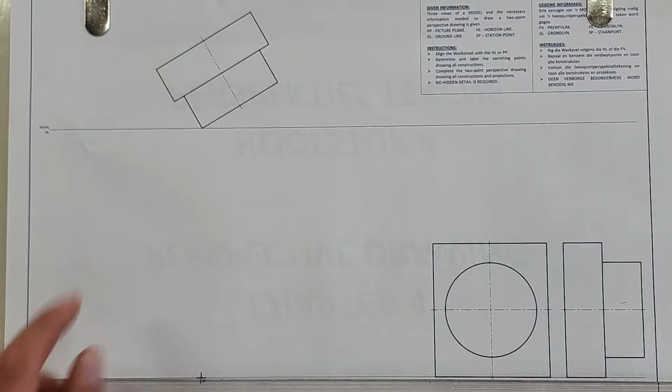Right, so we're back here on page 41 in the HSE Amazing Workbook, and they've given us 3 views of a model. We have a top view given, and then we have a front view and a left view. So if I look from the left hand side, this is what I will see. That surface there is this one, that surface is this, and then from the front, of course, it's in this direction. Then they give the picture plane, and the HL, interestingly enough, is on one line. At the bottom, we have our station point and ground line. Also, SP is on the ground line.

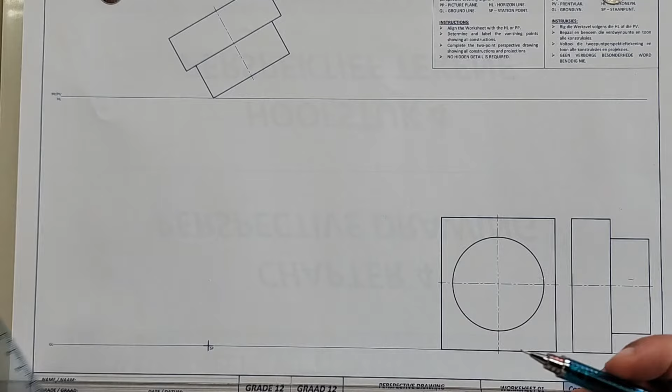Now we've done this in previous grades, of course, so it should be all straightforward for you. How do we start a 2-point perspective? I'm just going to go through the basics in this lesson to make sure you understand it. What's the first step? What's the eerste stap? Help me out. You determine the angle there, after you've lined up your paper, of course.

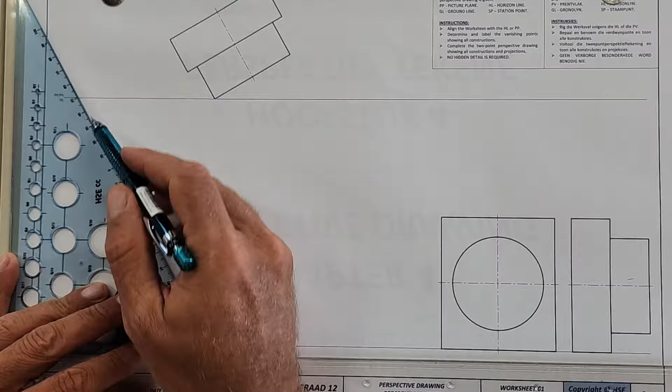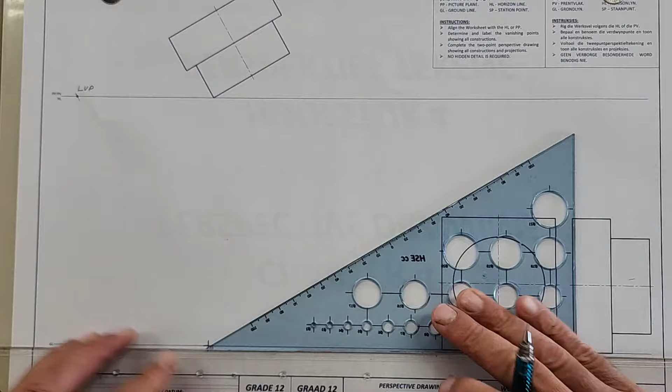Then from your SP, you're going to aim for the picture plane, make a mark. Now, in other examples, you would have projected down to that HL, but it's on exactly the same spot. Grade 12s, make a dot right there, left vanishing point. That's 2 marks already in this drawing. Next one, you flip it, double check the angle, it's at 30 degrees. If you need an extension, help yourselves out here. It's at that point, make a clear dot, right vanishing point. You've got your first 4 marks and you haven't even started.

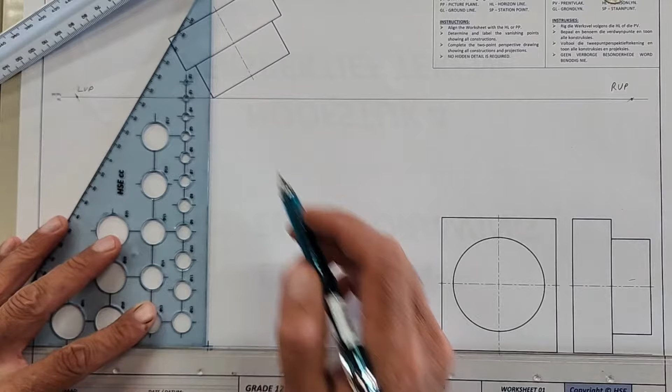Next one is to draw your line down from this corner to the SP if it's in line with each other. That's your reference line. I'm just going to move my board a little bit because I want you to draw with me.

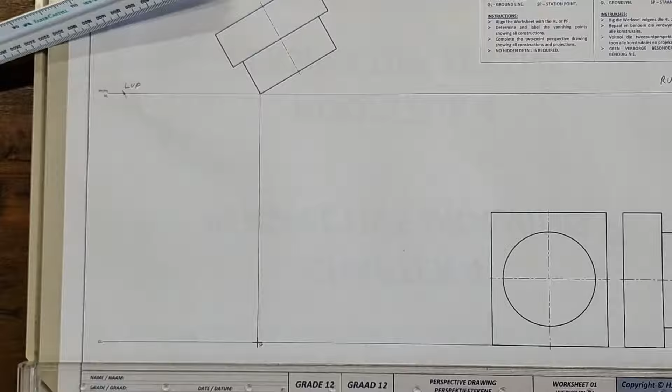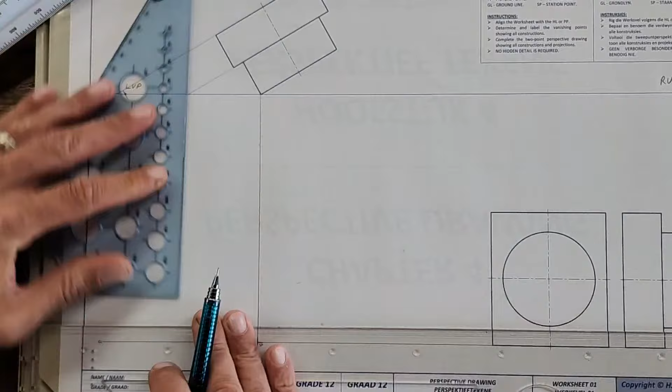How to hack a 2-point perspective. You are going to do the following. We're going to project our top view onto our picture plane. I need you to look at me. Hey, almal van julle. At that 30 degrees, this is how we hack it. We're going to just project these corners down to the picture plane. So there's one, there's the other one. Yes or no? This one is already there. Let's move now this point down to our picture plane. We'll do one at a time.

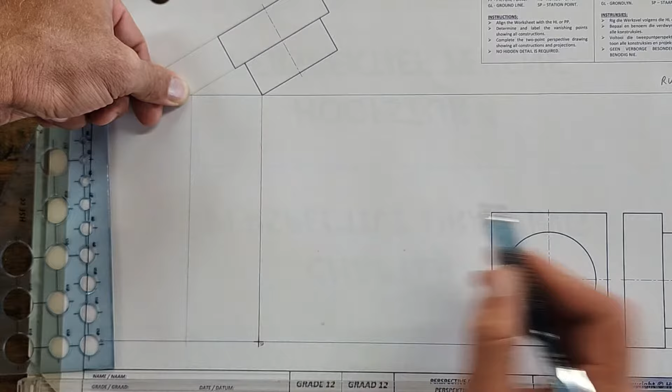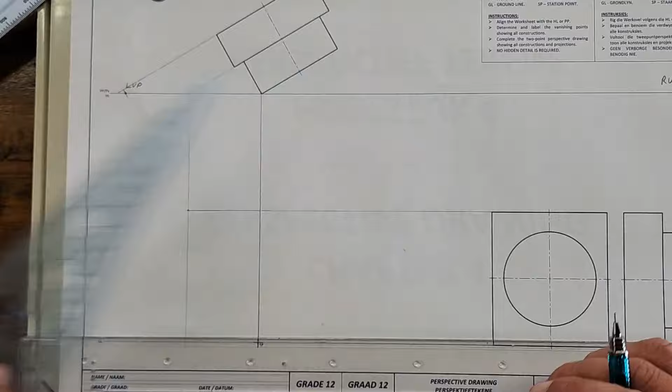Let's just draw this back part first. This height, I'm going to project across to where it touches the height line that I've brought across. So I'm bringing this point across and down, and I'm bringing that same point from the other view to bisect it, to meet it. I'll draw them in color for you in a moment. So that's a construction line. From this point, where do I go to now? Back to the right vanishing point. And what I have here is a line that actually runs on that top all the way. And all I need to do now is bring this corner down to the SP.

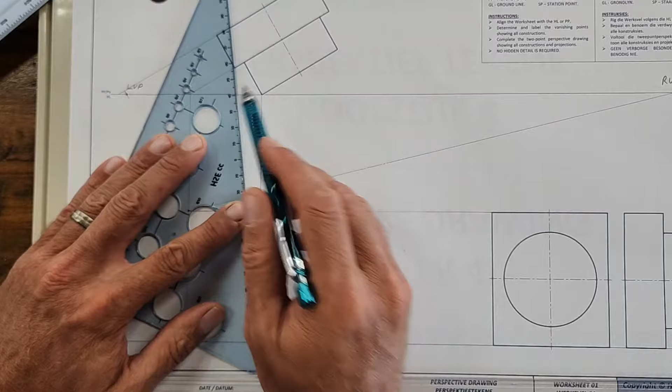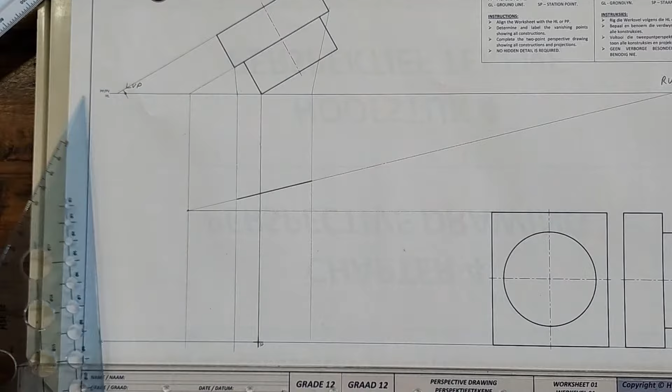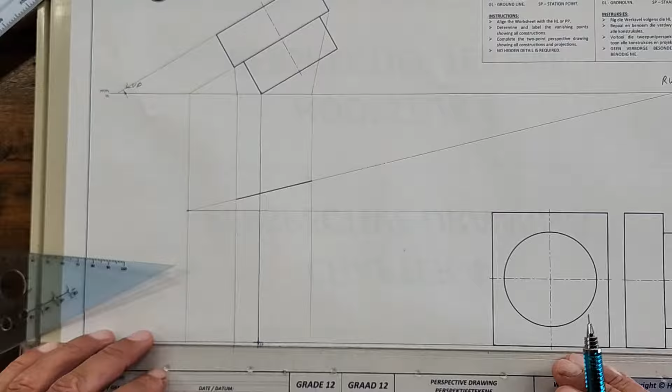I'm going to repeat myself if I've lost you. You'll see what happens now. Bring that corner to the SP. Aim it for the SP, and down. And this line here is the front of that box at the back. Keep with me, don't disappear. Then it goes down. So this corner here goes down up till this, right? That is already at the SP here at the bottom. This corner goes back to here, down. That goes across, and we're doing the same with the bottom of it.

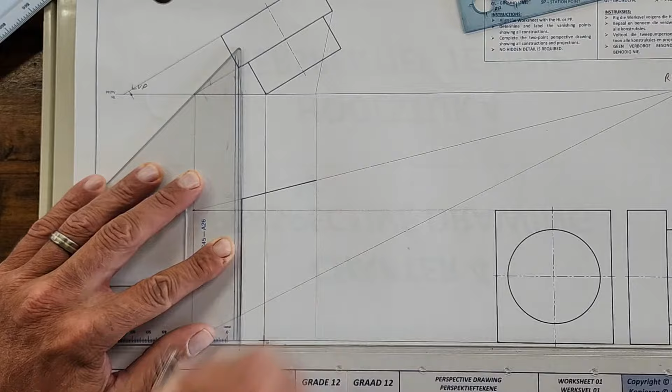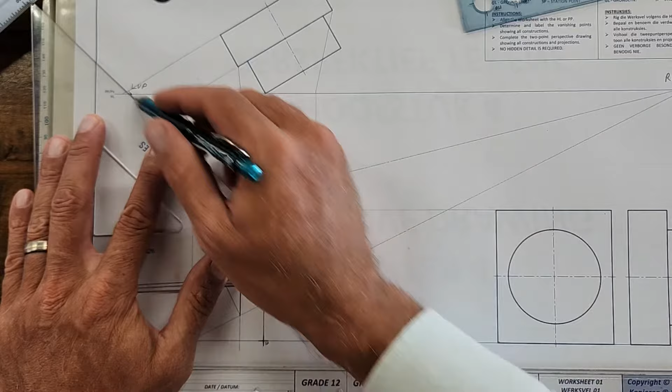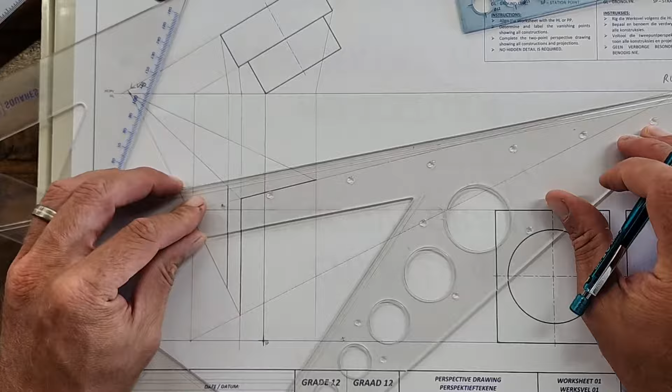Same step. Some of you might not have seen this specific method before. So what we have, this line is this line. That line is this line. There's still some depth that needs to be added here. You agree with me? Where does this go to? To the vanishing point. Back, back, and back, all three of those corners. How far back? Well, there it is. From this point bring it down to the SP, aim it down to the picture plane, and then straight down. I'm going to repeat myself in a moment.

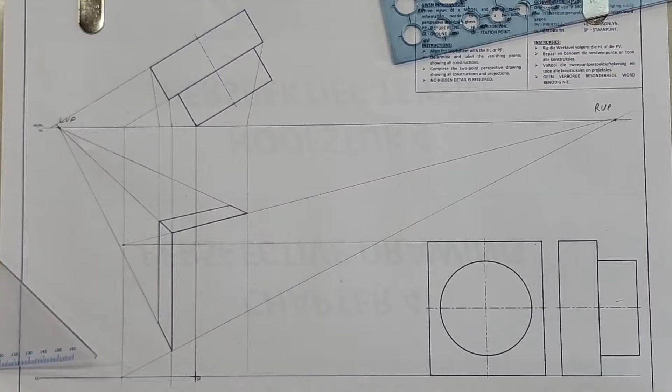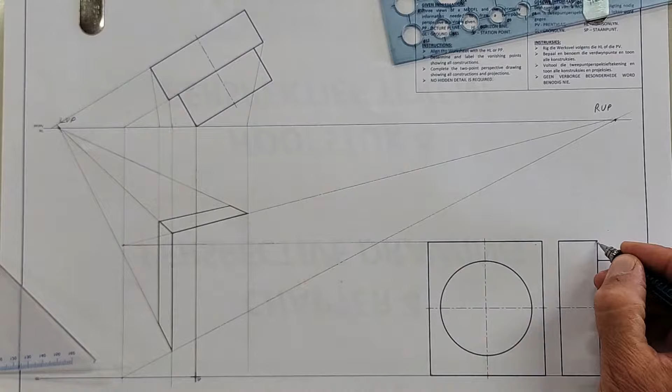This is probably the easiest way. There are other methods also, of course. But let me talk you through how I got to this point. So I have a top view and I have a front view. You pick a point here. We bring that point at the same degrees down to the picture plane and straight down to the SP. We pick the corner. This corner, you agree with me, is this corner. Yes or no? Yes. So we've projected it to the picture plane and down. And then we bring the height across. And where they meet each other is a critical point.

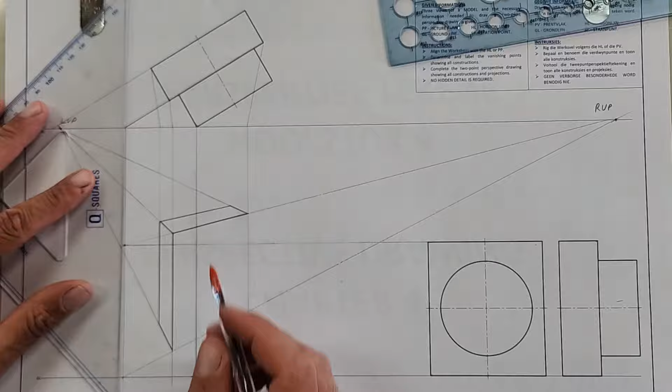Okay. So let me draw this in red for you. We projected this one down. Then we've projected from that point straight down. Okay. And this corner is in fact that corner. So the height brings across. Where it meets is that pink dot.

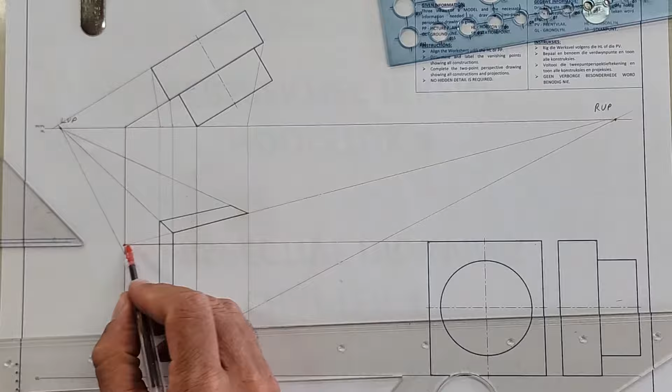And from there, I now project it back to the right vanishing point. So it's a construction line that runs along the top of that front. And so all I need to do is aim to the SP these two corners. If I bring them down, I get those two front corners. And from there it goes down.

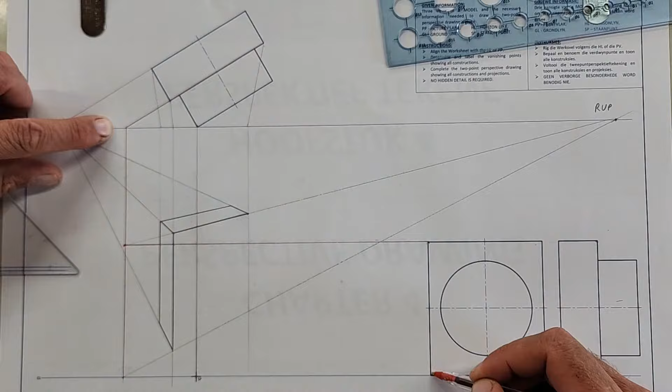So the same here, this corner is also the one at the bottom. Bring that across where it meets. I project back to the right vanishing point. Now I've got the line running at the bottom here. And all I did is bring those same points down. I have that bottom corner and that bottom. We won't draw this one yet because there's a circle there.

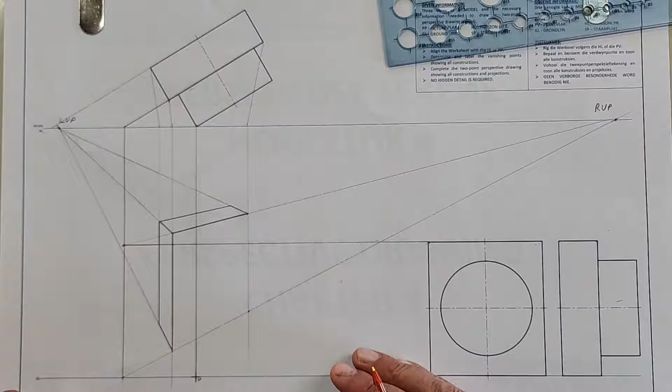Okay. On that step, is there anything that you'd like me to repeat? Did you get to start? Are you on the same step as I am? Yes or no?

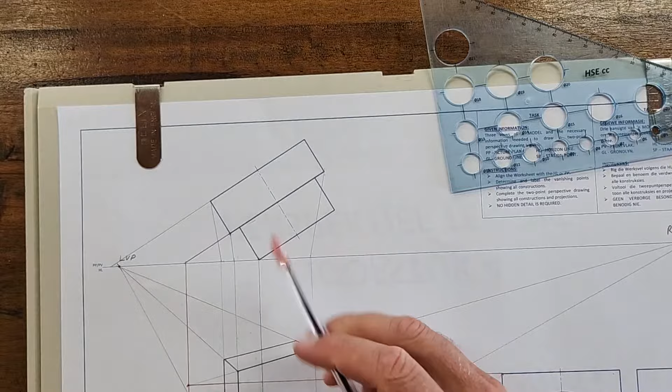Ja. Is jy by? Anybody needs me to repeat the step? Happy? Okay. What I wanted to remind you is if you start this drawing, look at your top view quickly and do this. Any line in this one that aims in this direction, that center line, this one, where is it heading if I would extend it? To the what? To the left vanishing point.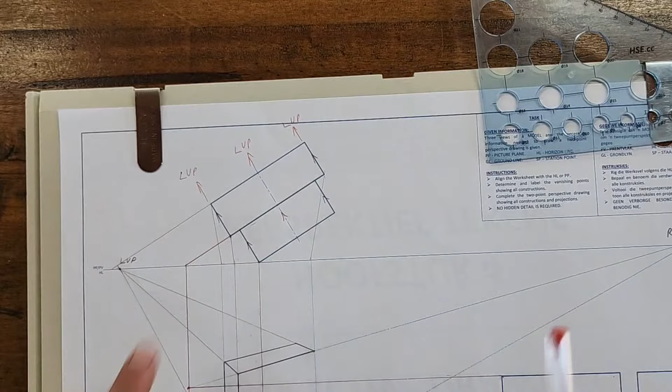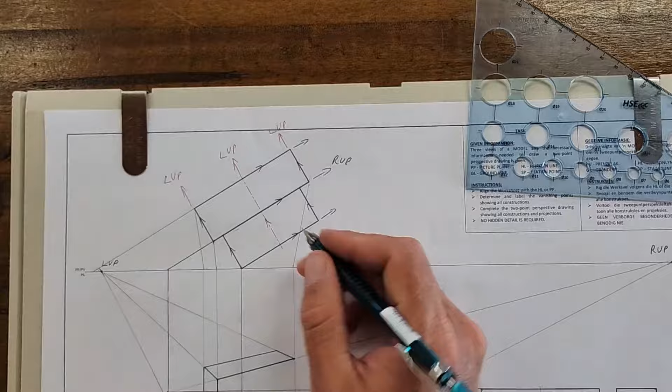Okay? Any line that's heading in this direction is going where if I would extend it? The right vanishing point. Do that at the beginning because these drawings are going to become so complex that when you are here, it's going to start getting confusing. But if you've, in the beginning, helped yourself with something like this to tell you, lines heading in this direction, they are going to the...

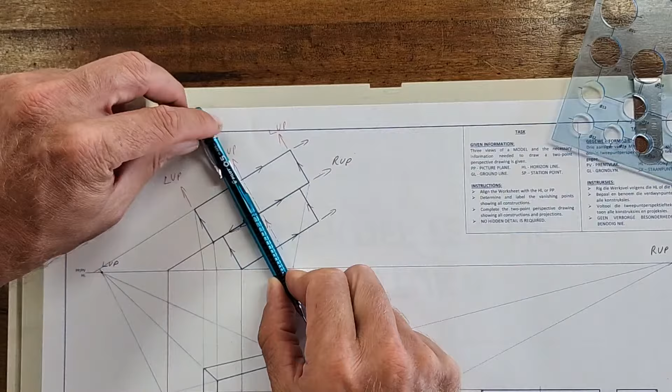Do you agree with me? A line heading in this direction, it is still aiming at the right vanishing point. It's orientated in the axis to the right vanishing point. Because sometimes you'll go forward and then you'll think, do I go right or left now? But it's in the same line, left vanishing point. All those lines. Okay. Yes or no? Oh, glory. All right.

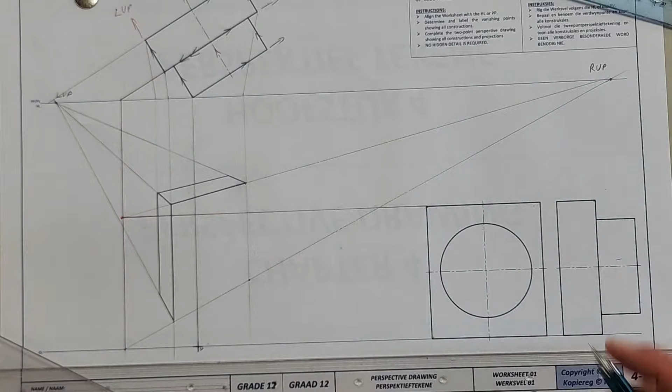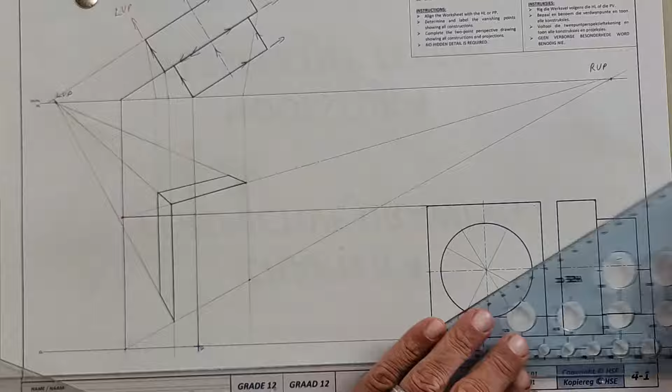Let's now see if it's going to work with our circle as well, because that's our next step. A circle, if you have a circle and you don't know what to do, what do you do? 12 equal parts. So just here on the side, flip it. Okay, so we want to see this construction. Don't think you can take out a French curve and get this done. We'll start here with the 0. 1, 2, 3, 4, 5, 6, 7, 8, 9, 10, 11, back to 12.

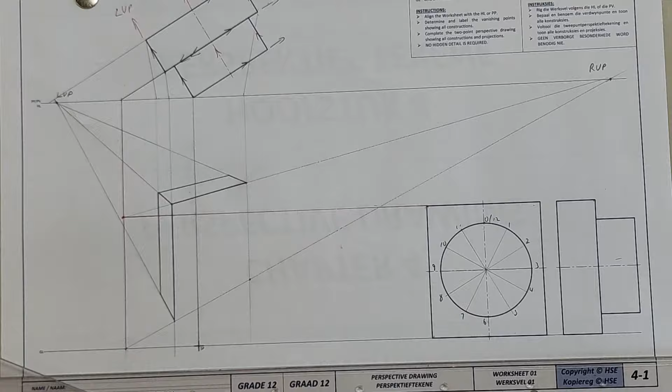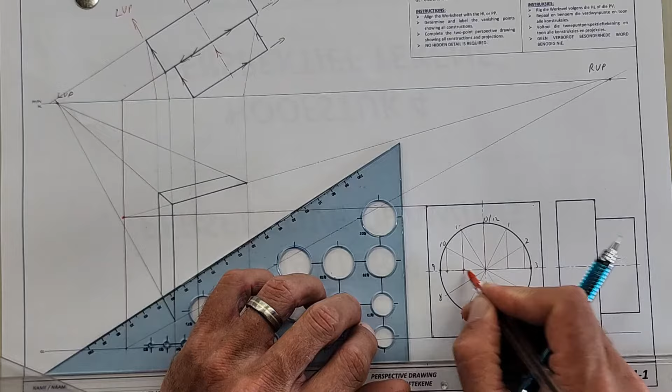Okay, but what do I have here? If you look at that, 3 is already on that line. If I bring 2 down, there's a mark. 1 down, there's a mark. 0 here. 1, 2. So these points are the ones that I need to copy to my top view. And the easiest way to do that is to take your compass.

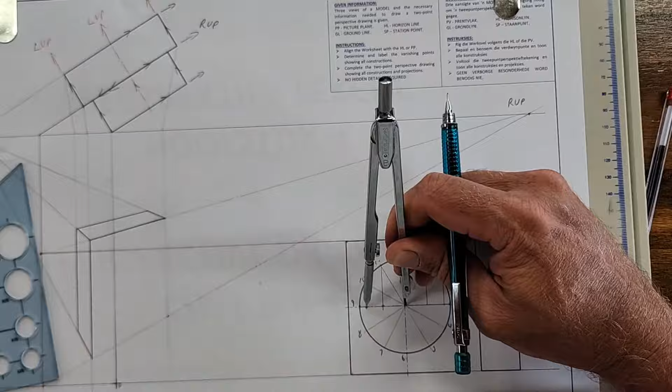Well, we know that the outer one, of course, should be the same as the one that's given. All right. So now we just go to the second one, that distance, yes or no? Take this away, this way. That should be the same on either side. Okay, so I'll just zoom in here a little bit for you to see this.

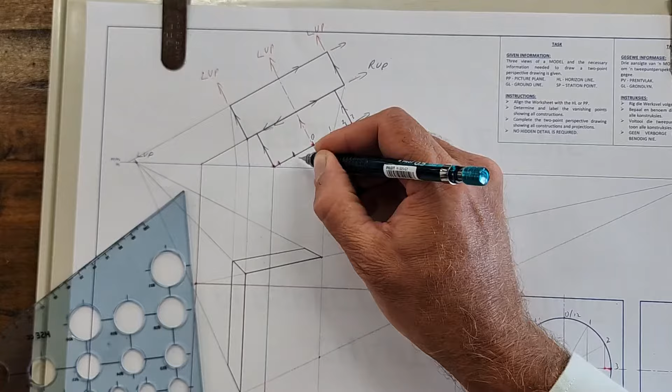Okay, so there are now these measurements I've gotten from here. And they are in fact representing on the top 0, then that's 1, 2, 3, below it is 4, 5, 6, 7, 8, 9, 10, 11, and 12. See the numbering? Similar to here, 0, 1, 2, 3, 4. And so now I can do exactly the same steps that I've done up to now. So let's see if that works.

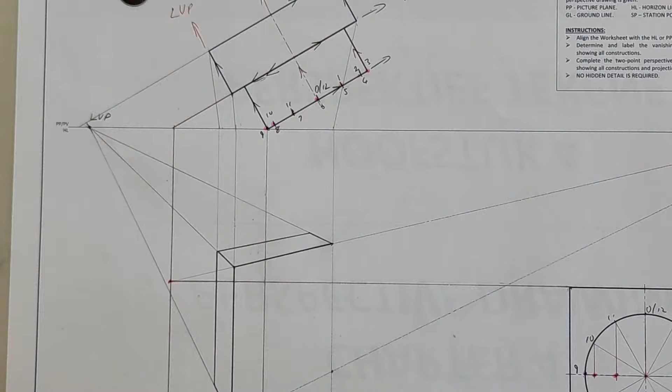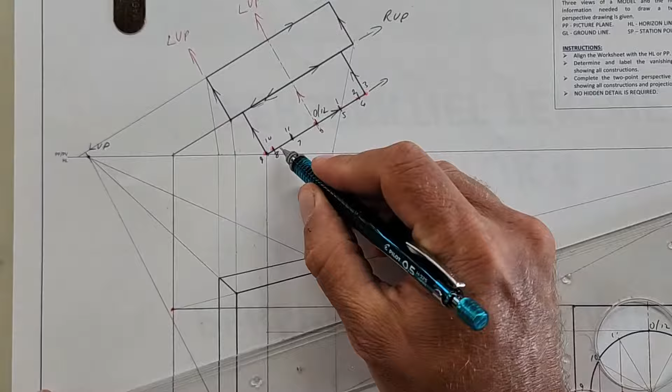This line is already aimed to the picture plane. It's at that point. Come down. Now I bring across my heights. So let's just do the 0 and the 6. There's the 0. There's the 6. Okay. And what do I do now? I go back to my right vanishing point. Look at this line. This line was aimed to the right vanishing point. So now I aim that to the right vanishing point.

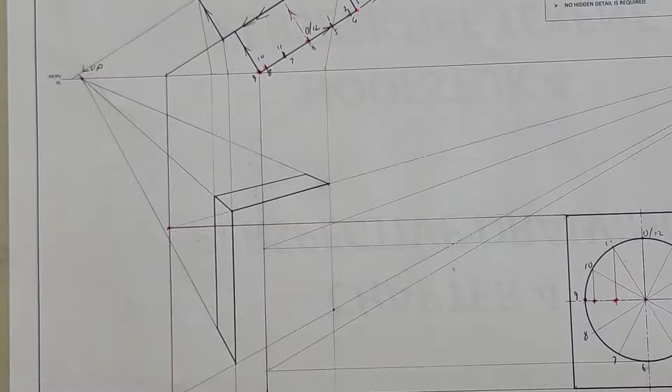Okay. Same with the bottom one. Okay, where is 0 and 6 on this? Well, I'm going to get that from the top. 0 and 6. Bring that down. There's my first 0. There's my 6. Okay, now let's do the next one.

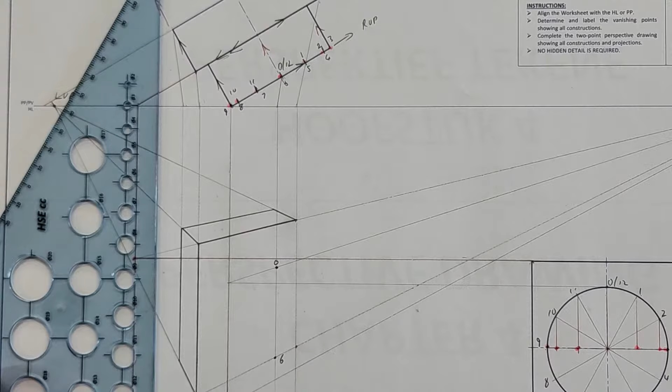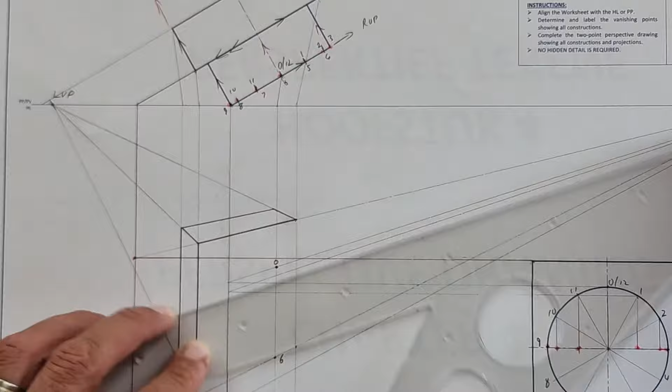Let's take 1. All of these are already to the SP, down. I'll take the height from here, the 1. So just one at a time. There's 1. Well, technically 1 and 11 are on the same height, right? Aim it to the right vanishing point. Now I can bring 1 down.

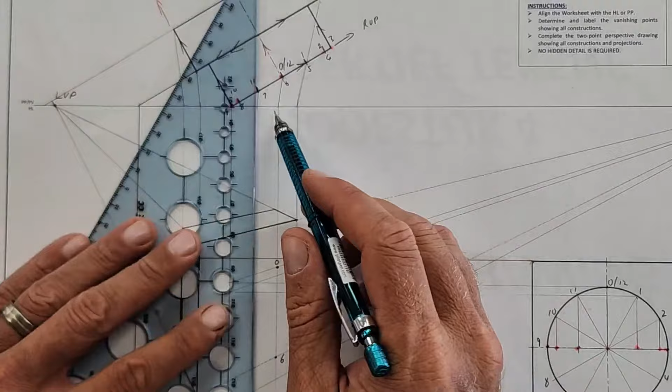Okay, let's do 11 while we're on that line. Aim it to the SP. That's 11. Are you following? Next one is number 2, which is also the bottom of 4. You just do 2 first. There's 2. Bring that across. You can do 4 across.

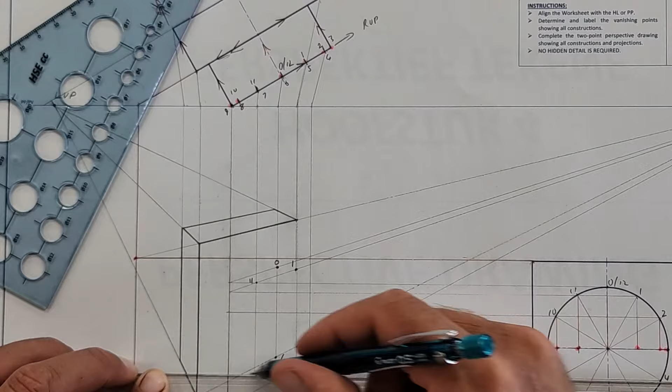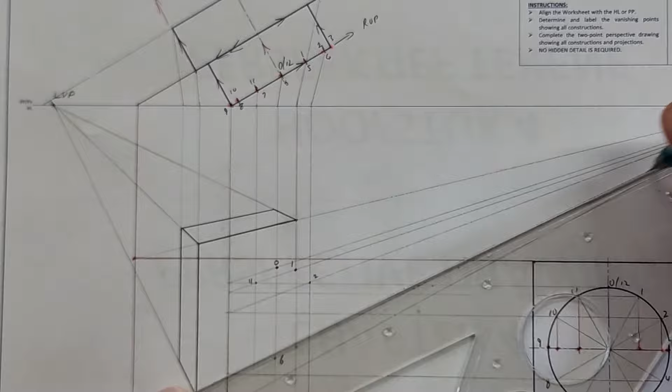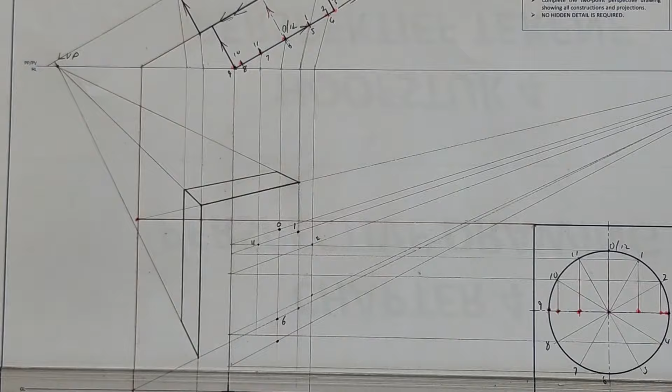So where 2 and 2 meets, dot. Where 4... actually skipped 5 is 6. So there was 6. Made a little bit of a mistake. That one was 6, sorry about that one. So 6 is in line here, back. Okay. Then 5 at the bottom.

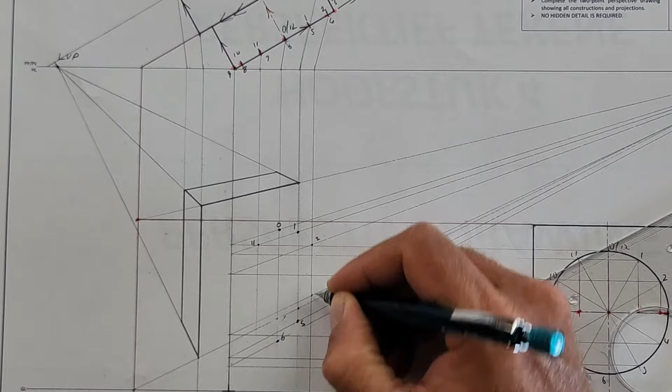So the outer part of 3 is still missing. Let's do that quickly. So from the outside here, I'll give you a valuable point now that I don't want you to forget. That's 3, height goes across.

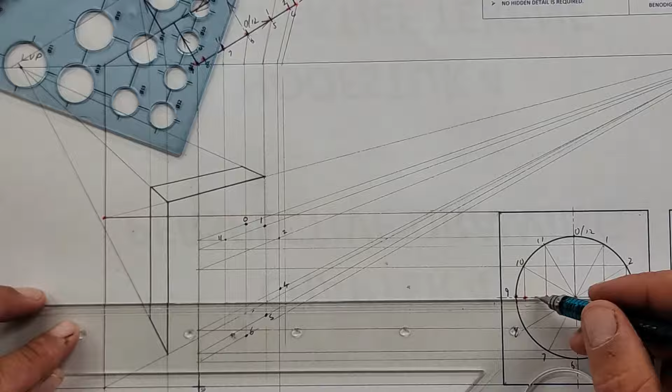What do you think is the biggest temptation for an EGD grade 12 learner doing a 2-point perspective? What do you think would be the temptation here with a drawing like this that you have to be cautious about? Kom help my gou.

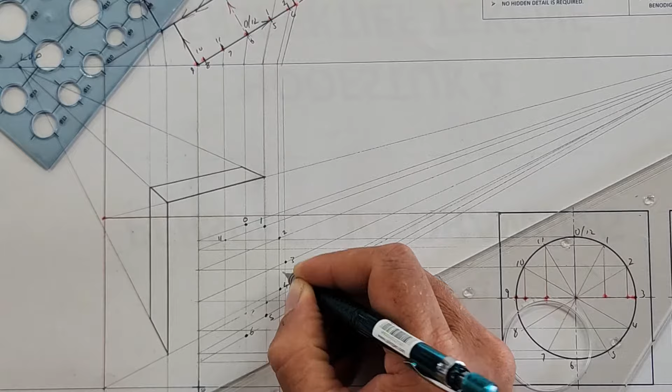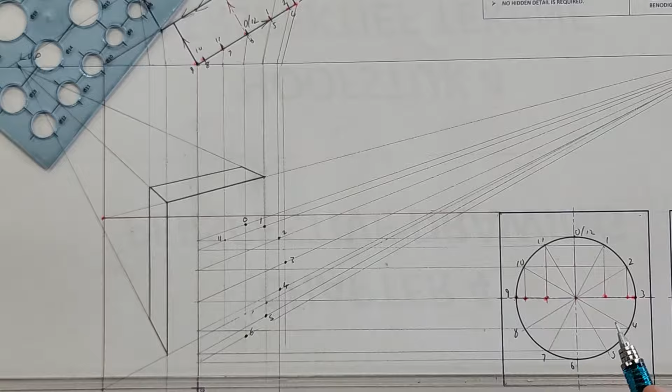Alright. How many of you have already done it? You've just gone and you've gone to all these different points. You've already brought them over. And all of these on top you've brought over without drawing any dots yet. You've just done it. Nobody? Yes, you've listened in the past. Please, people, do one at a time, because you see there's a lot of lines here. Ne? It can so easily confuse you.

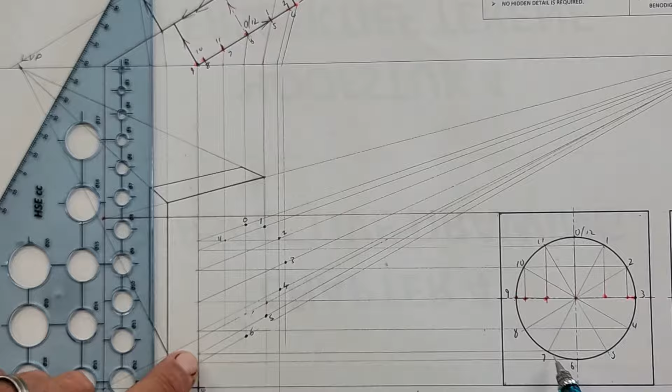So let's do 7. 7 goes across. It's the same as on 5. There it is. It's in this line. There's 7. Let's bring 7 down. Okay, it was in line with 11, so that's going to be straight down. But see here, now I have to keep my mind in line.

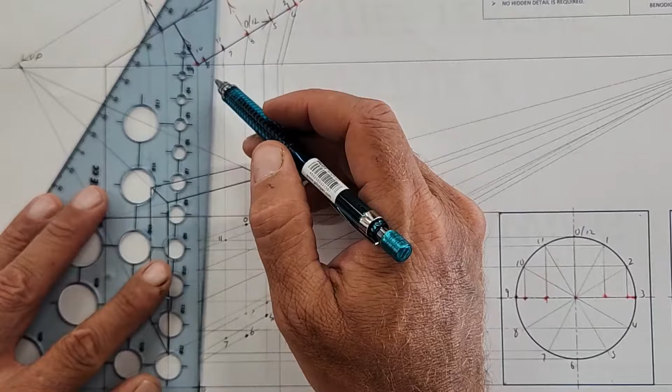Yeah, but I've already done this half. So it is easier. Once I get over half of it, it probably can be easier. But try to do everything at the same time, it becomes very complex. So I just want to caution you. Remember, this is now just a circle, but look, there's a lot of other lines also that you could have brought over. Ne?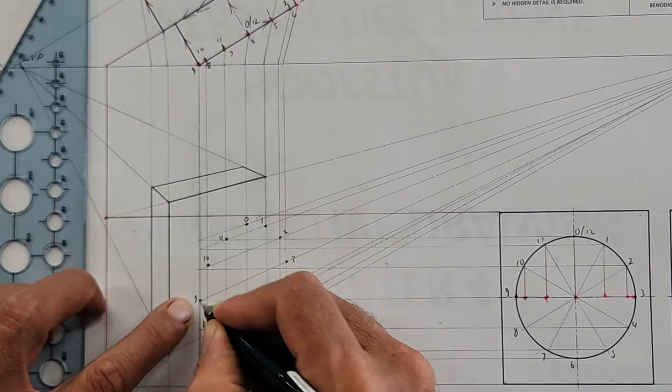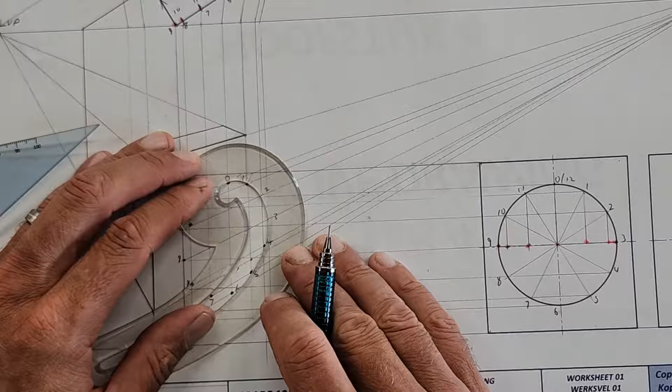There's our 8. So our 9 is going to be right there. 10. Okay, and if you make these dots nice and clear, that's going to help the marker to see that you are drawing with confidence. And then you're going to take your French curve. Find a spot on it that works for you. If you can, try and go through at least 3 dots at a time, just to help with the smoothness of this arc.

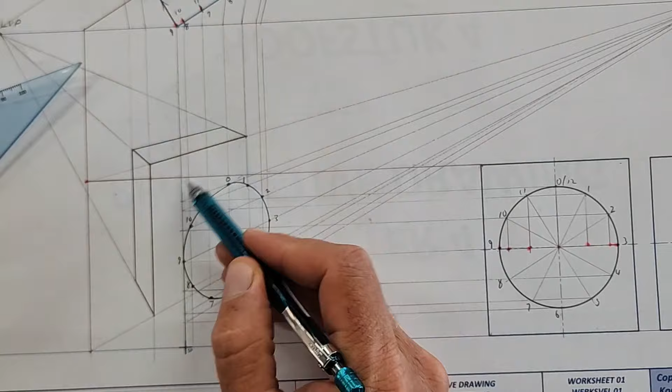Okay, there's the front, then it goes back. There's another circle here on this side that I'm going to still have to draw in. How can I do that? Well, I know that these lines can go to the back here, so that 0 can go to the back. That 11 now can go to the back. The 10 can go to the back. So also the 9.

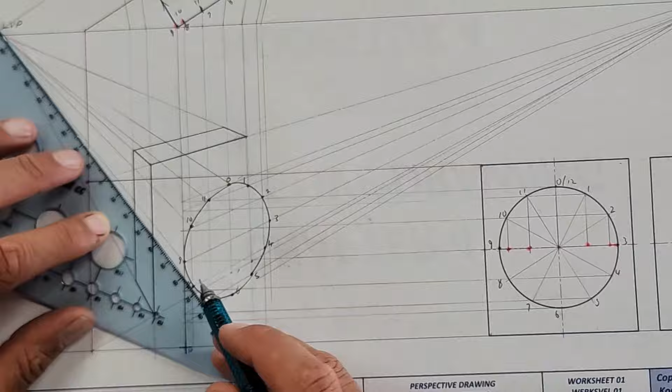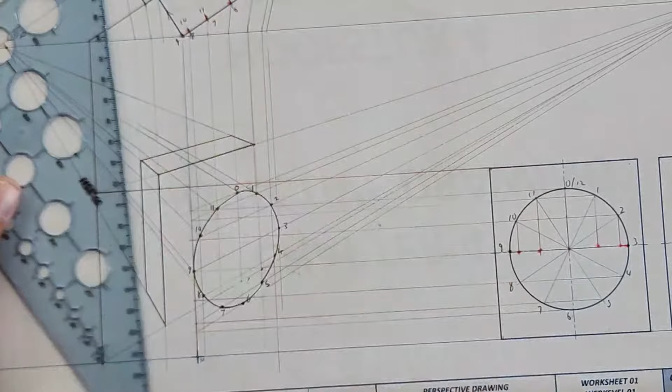And then I ask myself, how far does it go to the back before something happens? That one we'll also see. How far does it go back until something happens? Well, 9 goes only back to this point. There's the line for 9, goes back to here. And from there to the SP. Aim it. And down. So there's 9.

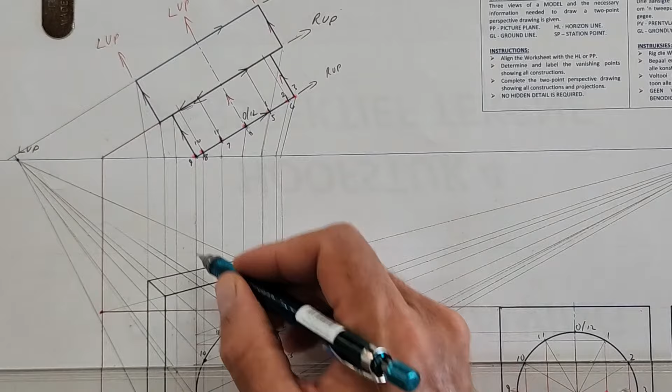What about the others? I will just have to do some construction lines here to make sure they are all indicated on this height there, in the top view. Right, and now I can go. There's 1. How far does it go back? Well, let's see. There it goes back up to this point. Aim it to the SP. And down. There it is. That's the last one. The outside one, that's the one I'll see visible.

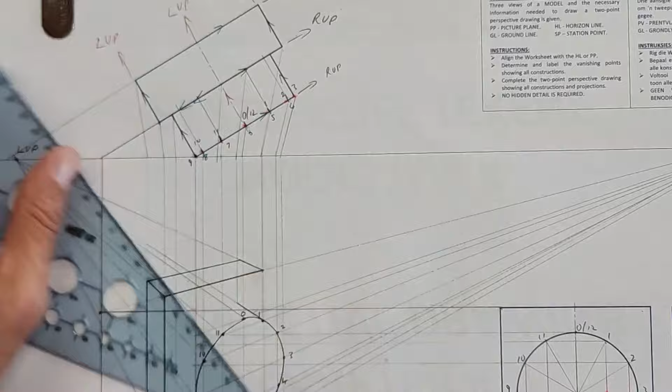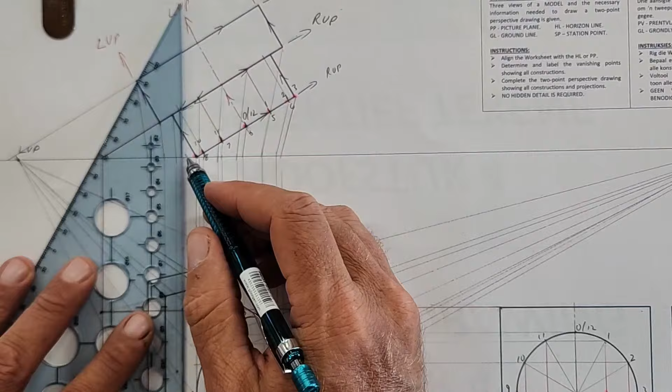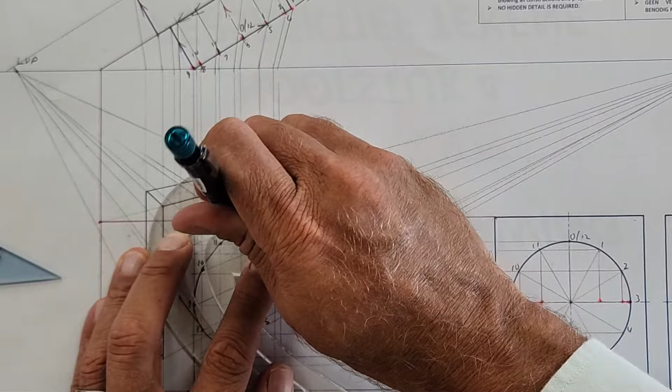Here we'll have another French curve, so it goes to 0 now. That's this one here. Make a dot. 11, there it is. Another dot, and if you make a nice big dot, it's easy to get it with your French curve. 10 and 8 is at the bottom, it's in line with this one. There's my French curve. Last thing missing is this one at the bottom here.

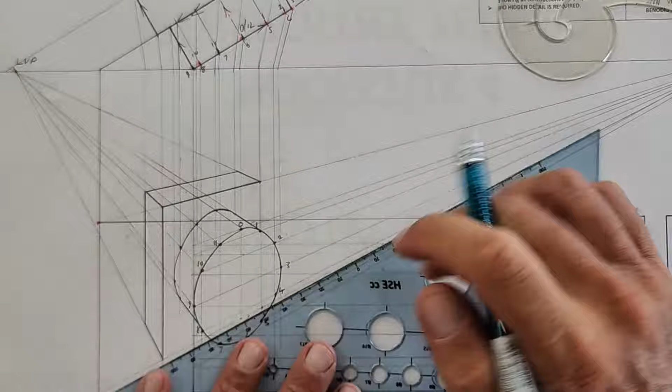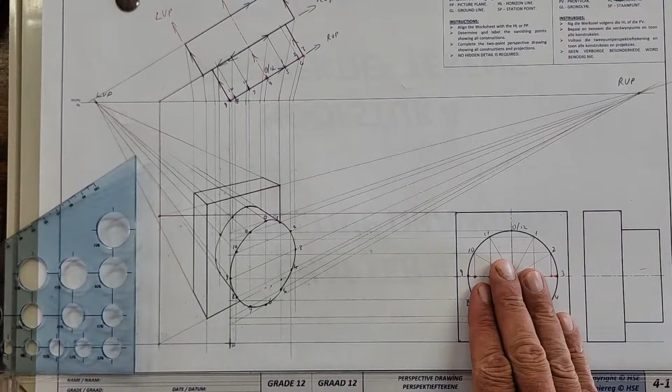Alright, that's how you do a quick 2-point perspective using the height line method. So I'll just revise that quickly by zooming out for you. So you can have a side view, you can have a top view. That top view, you can project one of those corners down to your picture plane, then straight down, you bring that same dot, that same corner, you bring across where it touches back to your right vanishing point, and that line is a line that runs on top of this model.

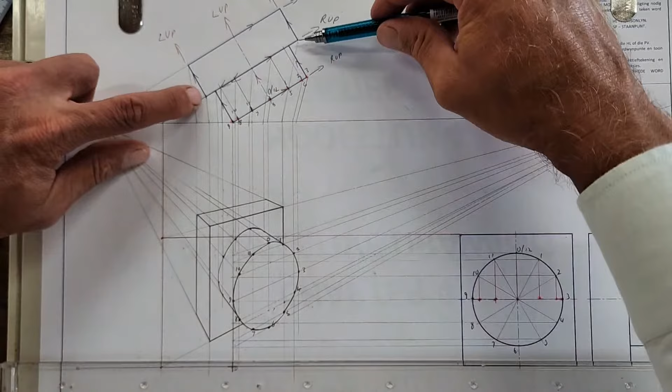And so all you need to do is determine those 2 points and then project that down, and where it meets you get your first corner. So you can do that with all of them, including your circles.